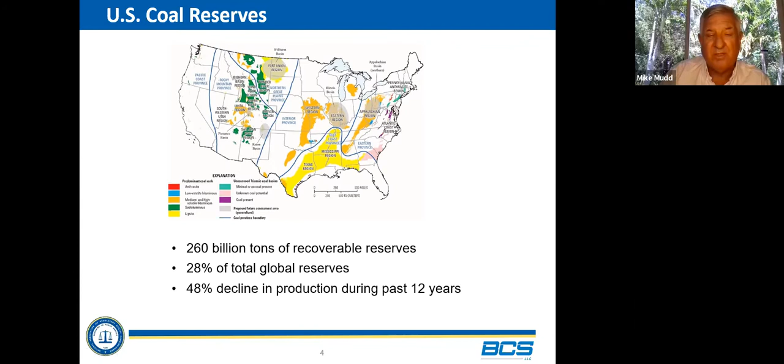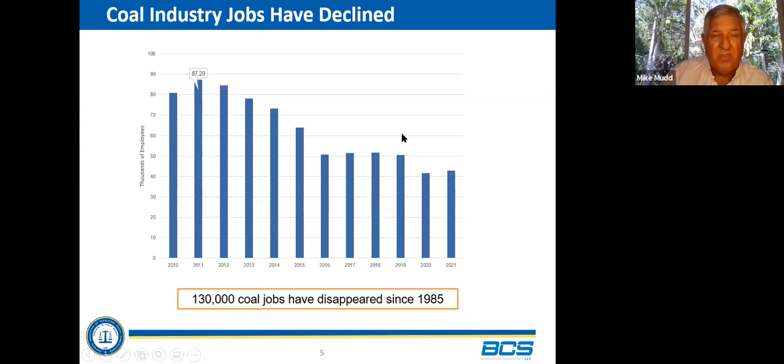Let's first talk about coal, which some now say is a four-letter word. But we have to remember that the United States has huge coal reserves—over 260 billion tons, which is 28% of global reserves. At the same time, there's been a 48% decline in coal production over the past 12 years. That means our national resources are staying in the ground rather than being used, and jobs have declined in the coal industry. In fact, 130,000 coal jobs have disappeared since 1985.

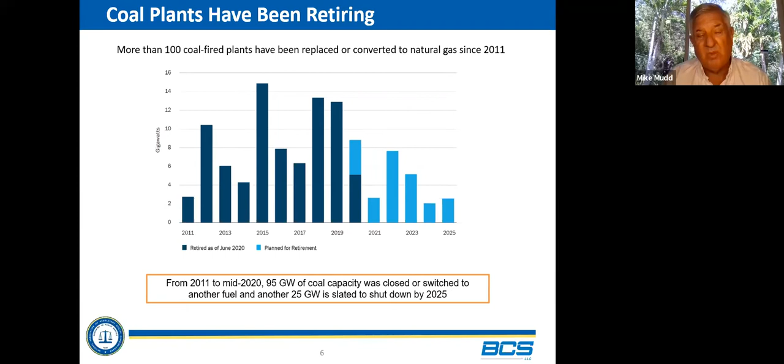At the same time, coal plants have been retiring. More than 100 coal plants have retired or been replaced with natural gas since 2011, which is 95 gigawatts, with another 25 gigawatts scheduled to be shut down by 2025. This touches me personally because early in my career I was involved in design and construction of 1,300 megawatt plants, the largest at the time in our country, very efficient supercritical plants with state-of-the-art controls. Those plants are being shut down now, showing the rapid shift away from coal. When we built them, we thought they'd last 40 to 60 years or more.

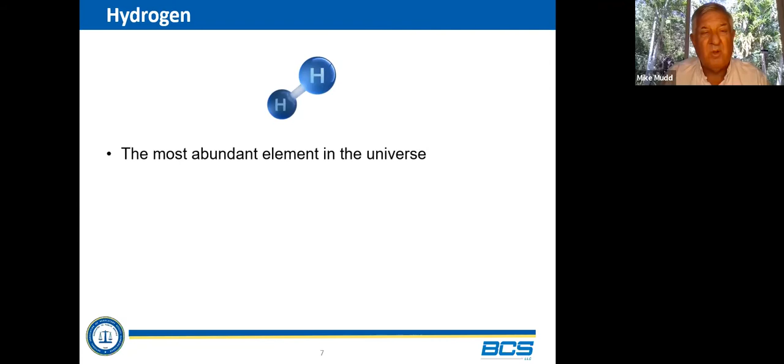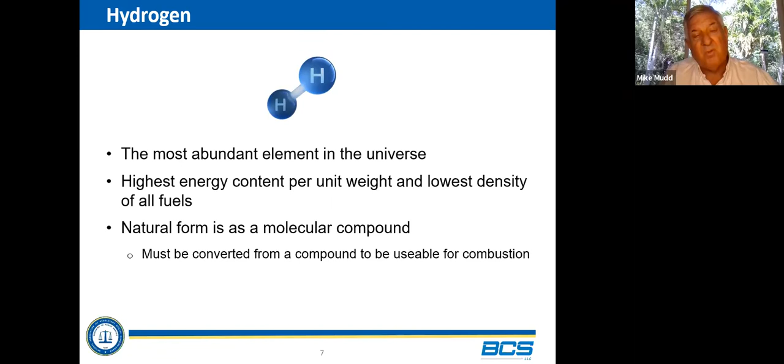Now let's talk about an eight-letter word instead of a four-letter word: hydrogen. What is hydrogen? It's the most abundant element in the universe, with the highest energy content per unit weight and the lowest density of all fuels. Its natural form is as a compound—you don't find natural H2 in the atmosphere. Therefore, it must be converted from a compound to be usable for combustion, which I will get into.

There are a lot of advantages of using hydrogen. It's a versatile fuel that offers a path to long-term economic growth, with the potential to meet 14% of the total U.S. energy needs.

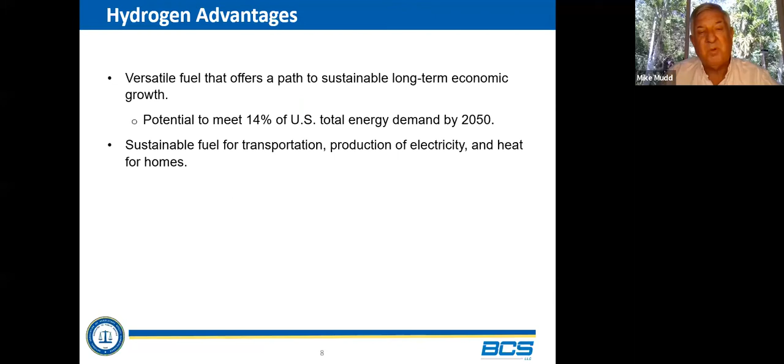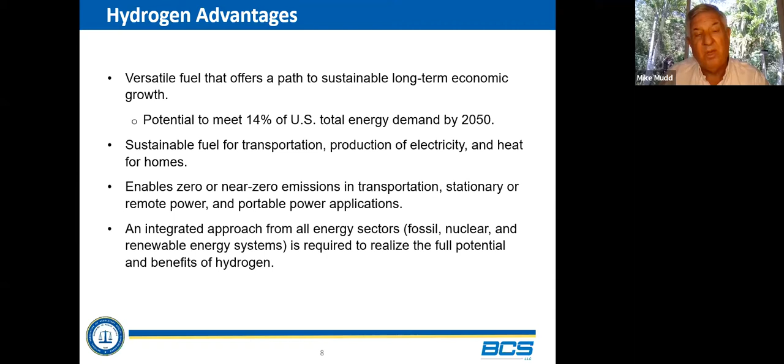Hydrogen can meet energy demand without emitting CO2 by 2050. It's a sustainable fuel for transportation, electricity, heat for homes, and many other uses. It enables near zero emission use in transportation, remote power, and portable power applications. With hydrogen, you can have an integrated approach across all energy sectors if you want to realize the full potential and benefits of hydrogen.

Let's talk about the three ways hydrogen is produced. One is called electrolysis. You can look at it like a battery: you take water, put it in with a cathode and an anode, and it converts the H2O through electricity, breaking it into hydrogen and oxygen. Right now, this is the most expensive process for making hydrogen. I'll show that in a subsequent slide.

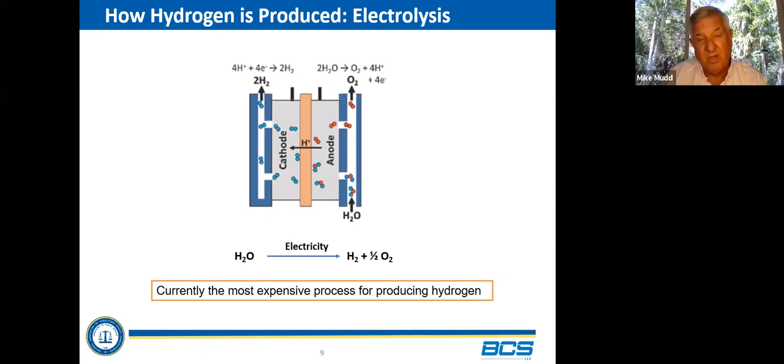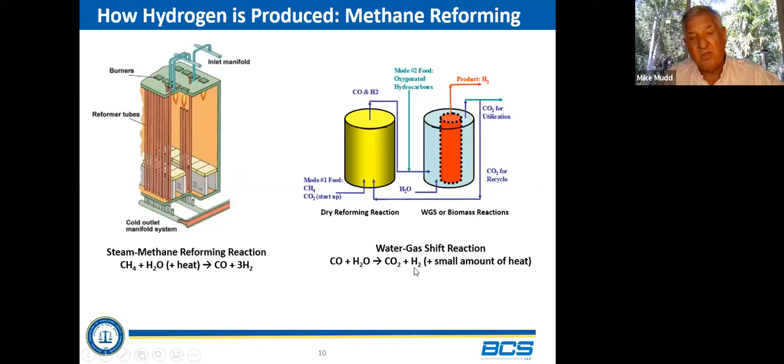Another method is called steam methane reforming. In that, you take CH4, natural gas, heat it with water, and it forms carbon monoxide and hydrogen. Then you take the carbon monoxide and run it through a water gas shift reaction, reacting it with water to form additional carbon dioxide and hydrogen. Right now, this is the most common way to produce hydrogen.

A third way we talk about in the report is gasification. You take a carbon-containing material, like coal, put it under pressure, feed it into a reducing atmosphere, and convert the carbon to carbon monoxide and hydrogen. I want to point out this is not an accurate chemical equation, but the oxygen is in there because there is oxygen in the process.

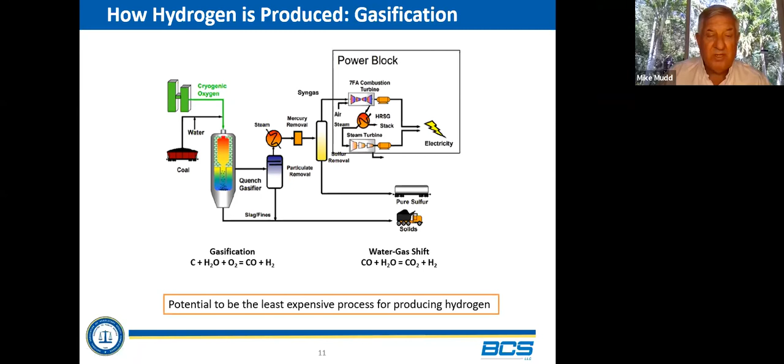You then take the carbon monoxide through that same water gas shift reaction and convert it to concentrated CO2 and hydrogen. That's a water shift - that's how gasification produces hydrogen. I'll go into more detail on that later. This also has the potential to be the least expensive process for making hydrogen.

The comparative cost of hydrogen production is shown here. You can see that steam methane reforming is roughly $2 per kilogram. Coal gasification is lower. If you do coal gasification with biomass, it's somewhat higher. At the same time, electrolysis is about 3 times higher than these methods.

This curve shows the relative CO2 emissions. You can see how CO2 emissions go up significantly with gasification, but if you do it with biomass or electrolysis, depending upon the source of power used, you can have zero emissions when making hydrogen.

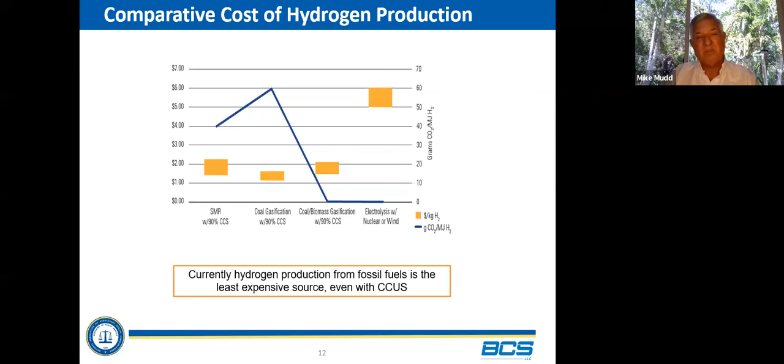Currently, fossil fuels are the least expensive source, even with CCUS, but we still have to address the CO2 aspect of that. Current hydrogen production in the US, as I mentioned, is dominated by steam methane reforming through natural gas, producing 96% of hydrogen in our country. Electrolysis is a trivial amount.

Worldwide, 76% is still by steam methane reformation, more by gasification, mostly in China, but still a very small amount by electrolysis due to the higher cost.

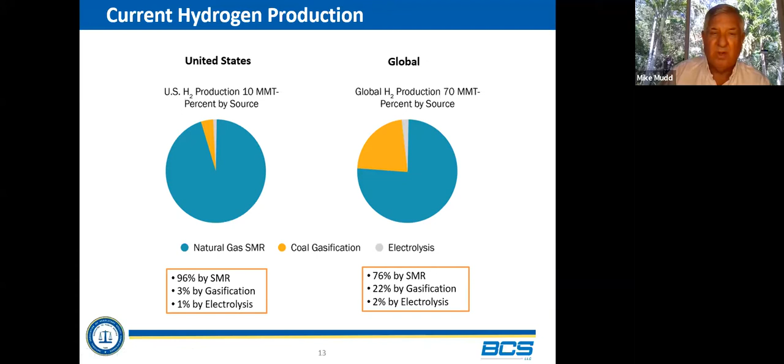Let me talk a little bit about coal combustion. What happens when you burn coal? The main elements of coal are carbon, hydrogen, oxygen, nitrogen, and sulfur. When you mix that with oxygen and nitrogen, you form carbon dioxide with the carbon, water with the hydrogen and oxygen, NOx - NO, NO2 - with the nitrogen, SO2, SO3 from the sulfur, and ash as fly ash or bottom ash. Of course, the outcome of that is heat.

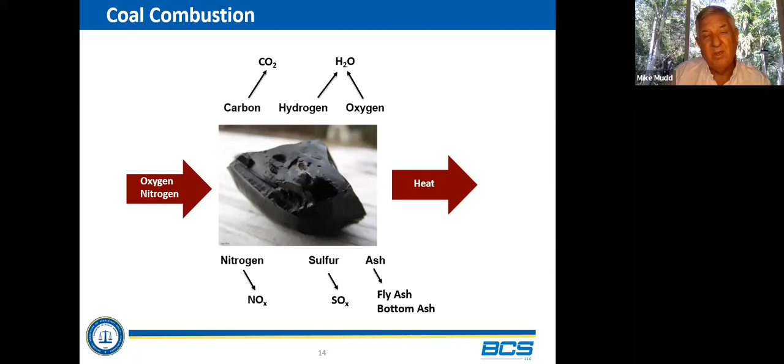So what happens in a boiler? You take that heat from combustion of coal, put it in a boiler in a power plant with feed water to make a steam turbine.

But now you have to put these elements on the back end of the power plant: an SCR, selective catalytic reduction, to remove the NOx; an electrostatic precipitator or baghouse to remove the fly ash; an FGD scrubber to remove the sulfur; and then a CO2 removal system, typically using an amine solution, to take the CO2 out before it goes to a stack.

Most power plants right now do not have CO2 removal. So from here, the CO2 associated with coal combustion goes to the stack and into the atmosphere. A pulverized coal plant with CO2 removal does not produce hydrogen in the process.

But this is the traditional way that they burn coal in order to make power.

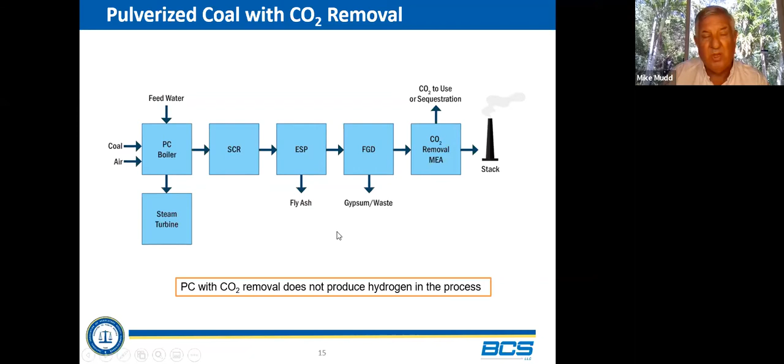Let's talk about gasification. In gasification, you take coal and feed it into a gasifier. Under pressure, you have that reaction I was talking about, where carbon is converted to carbon monoxide and hydrogen. You cool the gas, and then put it into another system for the water shift reaction, where carbon monoxide plus additional water forms carbon dioxide and hydrogen.

It's under pressure, so now you feed it through two additional boxes. One gets rid of the sulfur, and the other goes through a CO2 removal process. Because a gasifier is under higher pressure, the technology used to remove CO2 is much more efficient and lower cost than with a conventional plant.

You need an air separation unit to remove the nitrogen from the air, which allows a lower volume and a more efficient gasification process. The steam generated feeds what's called a combined cycle - there's a gas turbine and also a steam cycle. That combined cycle provides a much more efficient way to generate electricity than with just a steam cycle in a conventional PC plant.

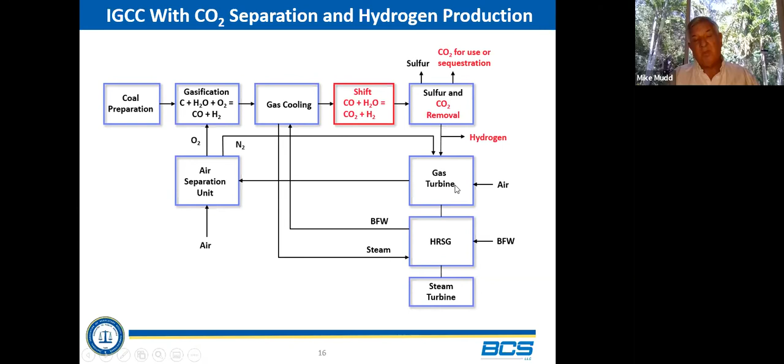In gasification, when you take the elements - in fact, give a good chemical engineer these different compounds and they can do virtually anything with it. That's why if you see a gasifier plant or a chemical refinery, you see an abundance of different vessels and processes, because under pressure you can do quite a bit more, which is the advantage of gasification.

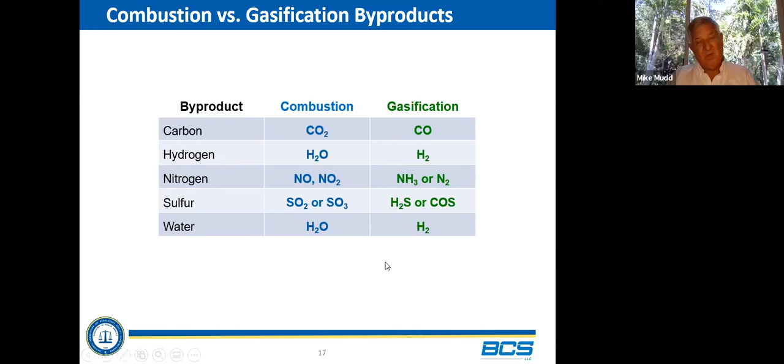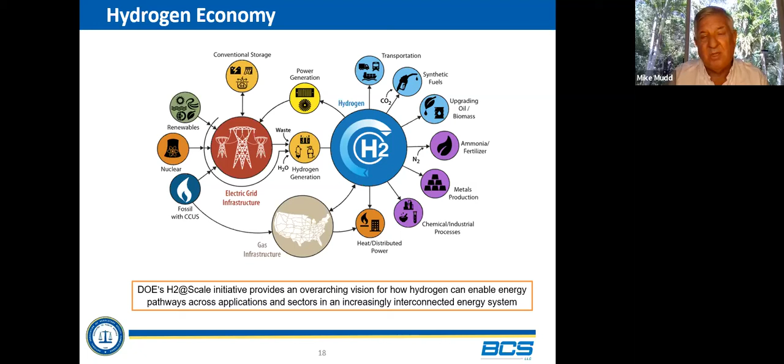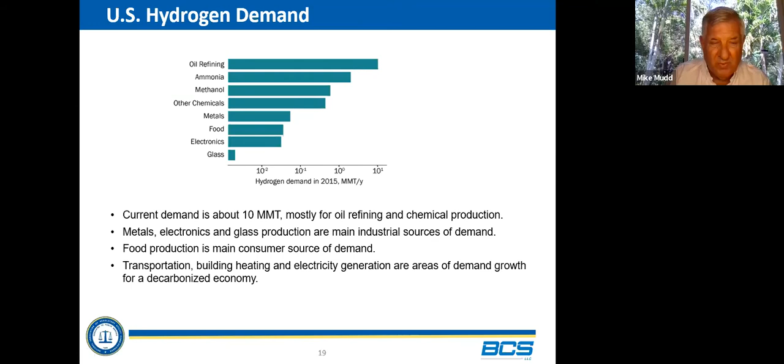What's the demand for hydrogen in this country right now? Mostly it's used for oil refinery and chemical production. It's used for metals, electronics and glass, and food production. It's used for transportation to a very low extent, building heating, and electric generation, but to a lesser level.

Right now in our country, the demand for hydrogen is approximately 10 million metric tons. But the scenario is that eventually we can triple that - enabling over 30 million metric tons of hydrogen demand in industry across all the different uses. How can that happen? It can only happen through R&D, by coming up with meaningful R&D targets and meeting them, and looking at the necessary market and transition barriers that have to be overcome.

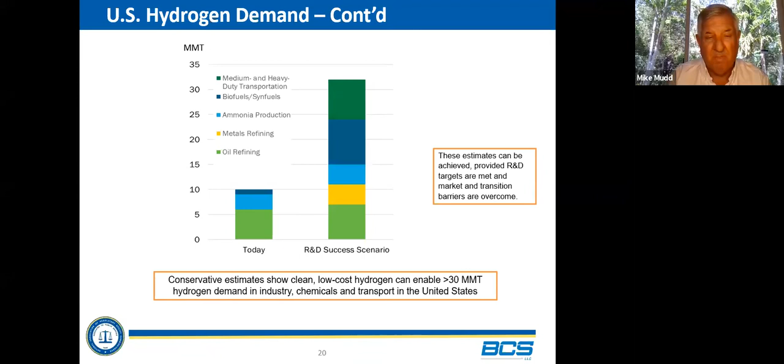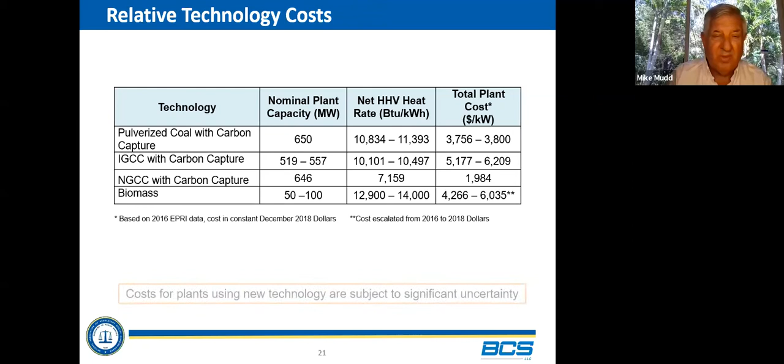Every report has to include the cost of technology, and this chart shows the relative cost of technology. I'm not going to go into that, but I do want to point out that a lot of these - PC with carbon capture, IGCC with carbon capture, natural gas combined cycle with carbon capture - these are estimates. These costs are typically developed through what's called a FEED, front-end engineering and design study. They're studies that assume a lot of assumptions and estimates. With first-of-a-kind technology, it usually takes 3 or 4 plants before you truly have a mature plant where you have a good handle on the cost.

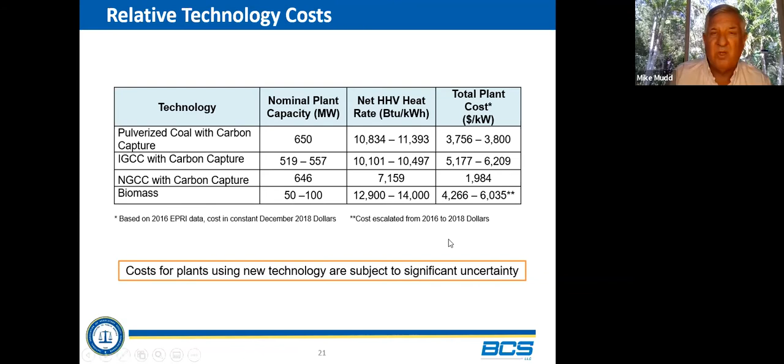So whenever you're looking at the cost for a new plant using new technology, look at it with jaundice. Get some consultants to take a look at it, to critique it, and make sure there's sufficient contingency and sufficient realism behind it, because there's a good chance it'll be low, which I think history has proven with many new plants. Talking about carbon capture, that's discussed extensively in the report, but I just want to touch on it.

The first one is called post-combustion, which you use in a pulverized coal plant. That's that box at the end. It's a flue gas separation system where simplistically you can look at it as a box where they take what's called an amine, and the amine is fed into a reactor, into the flue gas. It mixes with the flue gas, and at a temperature of about 100 degrees Fahrenheit, that amine will absorb the CO2 in the flue gas.

Then you pump it into another vessel to heat it up to about 200 degrees Fahrenheit. So you cycle it between 100 degrees Fahrenheit to capture it, 200 degrees Fahrenheit to release it. You recirculate it. The high cost of that and the challenge are two things.

First of all, it's called a temperature swing. And that temperature swing of 100 degrees costs a lot of energy. It can take about a quarter of the output of the power plant away in being able to do that. A lot of the research and development has to do with reducing that temperature swing, which would make the process more efficient.

There's also attrition. There's loss of the amine in the process. They've got to look at amines which would tend to have less loss to it.

Oxy-combustion, just want to touch on it. It's another technique that's used in the pulverized coal plant to recirculate the combustion exhaust, increasing the CO2 concentration. The higher the concentration of CO2, the easier it is to remove from the process, the lower cost it is.

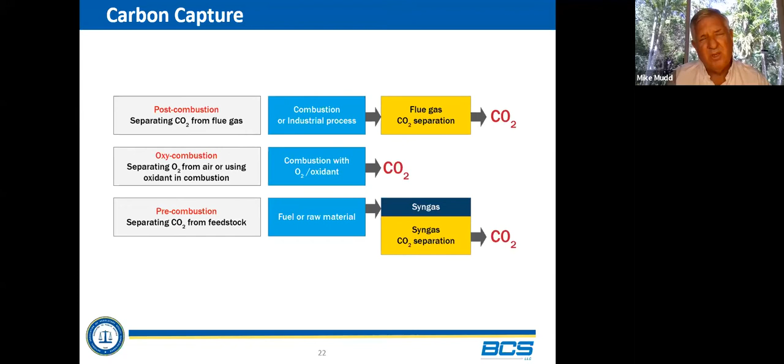And the challenge with making those more effective is two things: reduce the pressure swing, and find a sorbent with much less attrition that will last much longer. So those are basically what I just touched on. There's more detail on that in the report.

What do you do with the carbon once you've captured it? This is a DOE diagram showing that if you take the point source capture, you can put it in geologic storage, pump it down in the earth. There's been a lot of research about that. The advantage is you can basically store it forever down there. Two disadvantages: first of all, it's regional. Not all sections of the country have the geology conducive to good geologic storage. The Midwest Basin and the Texas basins are probably two of the most robust areas for carbon sequestration.

The biggest use now is for enhanced oil recovery, where they can take it, pump it into oil wells, change the viscosity of the crude oil in the ground, and make it easier to extract to improve the performance. That right now is the biggest use of carbon dioxide that is captured. And it can also be used for other processes.

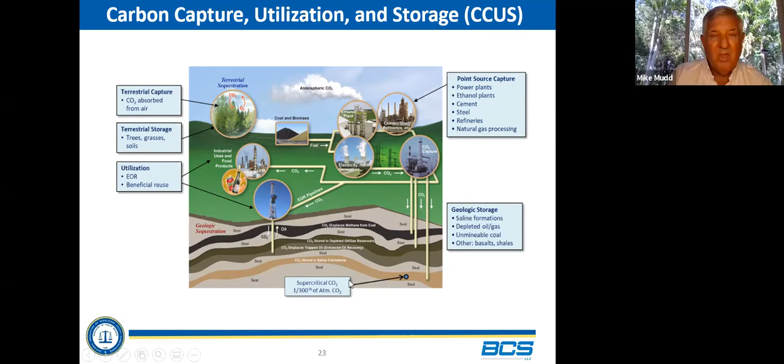I also want to touch on there are other ways to capture carbon that the DOE is looking at. Terrestrial capture, which is absorbing from air. There's terrestrial storage, trees. The biggest example is the rainforest in South America. So there's an integrated approach. In our report, we talk more about that.

There are many potential utilization streams for CO2 shown here. The DOE has a lot of research and development. And I don't want to go into details, but I want to pass a message on, and that is to look at the huge quantity of CO2 that can be generated.

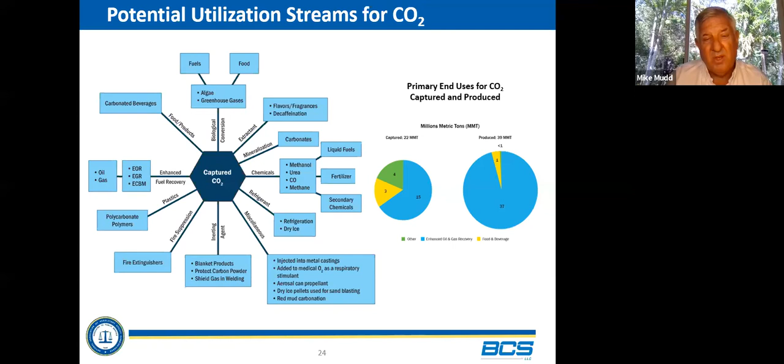A 1,000 megawatt plant would generate approximately 6 million tons of CO2 per year, and that's from a single 1,000 megawatt plant. So if you look at all the plants together, that is gigatons of CO2. So while there's a lot of interest in using it for smaller applications on a micro scale, if we are to reduce the CO2 in the environment, we need to focus on the mega scales rather than the micro scales. That's where the money has to be in order to advance the reduction of CO2 in the atmosphere.

So what are the challenges associated with carbon capture and utilization? It's very capital intensive. It's got a high parasitic load, reduces the output of the plant. It has a higher operating cost. The technology and operational risk, because it's still a relatively new technology. And there's legislative uncertainty too.

You know, should you invest in CCUS? Will coal be allowed to continue to be burned? Will there be a carbon tax? Can you store it? So there's big issues that have to be dealt with. There's uncertainty in the revenue stream associated with CO2. I mentioned the main use is enhanced oil recovery. In one of the case studies I'm going to touch, you can see how that can become a real issue. And there's a liability potential of CO2 leaks.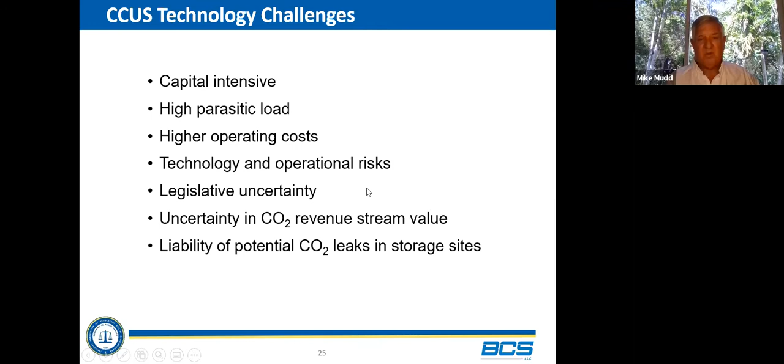I mentioned the underground storage. I believe it's safe. Geologists convince us that it's very safe, but it's the obligation of industry to convince the general population that it's safe to pump CO2 in the ground beneath them. We cannot assume the public's going to say, no problem, we trust you. It's up to industry to convince people and demonstrate that it's safe. Absent that, there's going to be a lot of issues with respect to the potential liability of CO2 leaks.

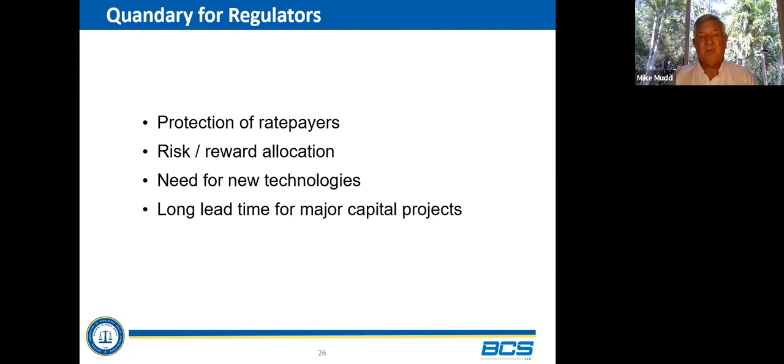So what's the quandary for the regulators? Of course, their job is the protection of the ratepayers. At the same time, how do they handle the risk-reward allocation? For every risk, who should get the reward? But we need new technologies to move on, to continue to improve our environment and our lifestyle. And there's a long lead time for major capital projects, so a decision they make today might not happen for up to 10 years.

So let me put it another way. What are the risks that have to be looked at? There are technical risks: the performance of a new technology, the guarantees for new technology, the availability, meaning how will it run all the time, or will it be down with shutdowns quite a bit? And what's the schedule? Can they truly have their arms around the schedule for a new plant? I'll get into that in a second too with the case studies.

There's cost risks. I mentioned there's cost uncertainty with new technology. With the long lead time, escalation is always an issue. What do you assume as far as the annual escalation? For the past several years, it's been low. Inflation's been low. Back 20 years ago, inflation was going crazy with steel prices and commodity prices and so on. It's hard to understand that, and who's going to take that risk? There's costs of redesign. As with something new, you've always got to make changes, and that's a big risk.

And the market prices, okay? When you come up with that, what's going to be the market price of the electricity, the hydrogen, the CO2? There's market risk, and when you're looking at over a decade worth of planning, how can you accurately come up with those market prices? And there's regulatory risk. It takes a long time for the approval of these projects. You'll have interveners. Whether you have a good or a bad project, you can know one thing for certain: interveners will be coming in and wanting to have their say.

There are many policy changes. Every time there's a policy change, it can impact the schedule and the cost. The biggest example is that when they were building the nuclear plants, there were a lot of policy changes. There were changes in codes and standards that caused design, redesign, and delays in the project. And finally, changes in law. Is there going to be a carbon tax? What's going to be the law with respect to emissions and so on?

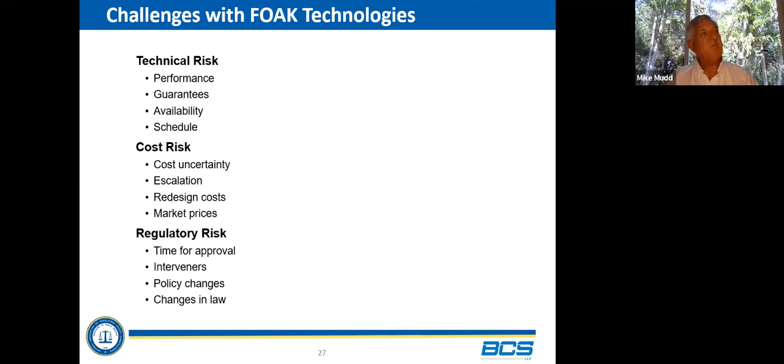Those are big risks. So let me show it another way. You have all these risks. All those risks translate into dollars.

And there's a tug of war. Is that up to the owners? Is it up to the users, the ratepayers? Is it up to the equipment suppliers? Who is going to take on those risks? It's always an issue, but it must be addressed before you can move technology on.

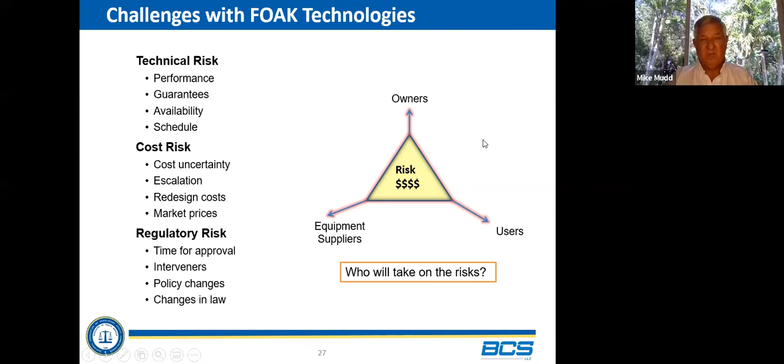Let me just talk about some of the other projects that I mentioned in our report. One is called the Petra Nova project in Texas, a $1 billion project. That project was a 240 megawatt slipstream, which operated from 2017 to 2020, a very successful demonstration of carbon capture from a conventional coal plant.

It became uneconomical when CO2 prices changed, the main output of the CO2 was to sell it for enhanced oil recovery to the oil companies. But when oil prices plummeted, it wasn't cost effective to use enhanced oil recovery anymore. The plant had to shut down. When the plant's sitting idle for a year or so, unfortunately, they still have to pay their mortgage. It becomes an impaired facility. Maybe it'll restart again with higher oil prices, but right now it's an issue, the uncertain market prices.

Edwardsport plant in Indiana, Duke Energy, a fantastic project, one of the pioneering IGCC plants in our country. Construction started in 2008, went to commercial operation in 2013. But it was beset by a lot of cost overruns and schedule delays. It's in successful operation today. But if you look at any of the reports about it, you'll see a lot of people have bruises.

The utility, Duke Energy, has bruises. The regulators have bruises, the ratepayers have bruises. So it's definitely an issue with respect to who's going to be responsible and handle those delays, even though it was a fantastic project.

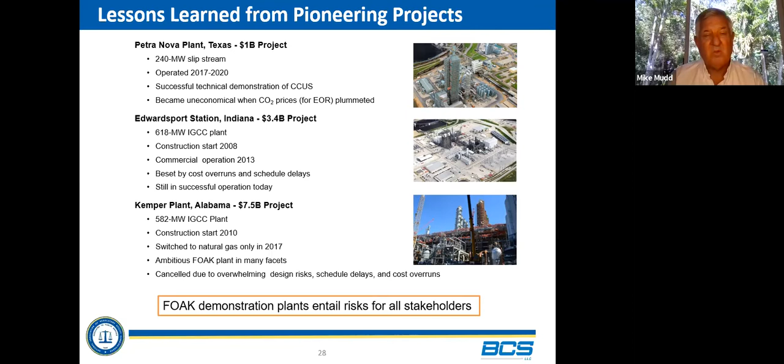It was switched to natural gas. Unfortunately, that transport reactor will probably never see reality anymore, which is a shame, but it shows the risk that you take. So the message is there's always risks for all stakeholders with the first-of-a-kind demonstration plant.

Now, the Department of Energy has a fantastic program to look at hydrogen. Two of them are the hydrogen strategy and their plan, which just launched a hydrogen shot. Their goal is that within a decade, they can have 1 kilogram of hydrogen costing $1. So it was launched just recently, and it's definitely worth reading those reports.

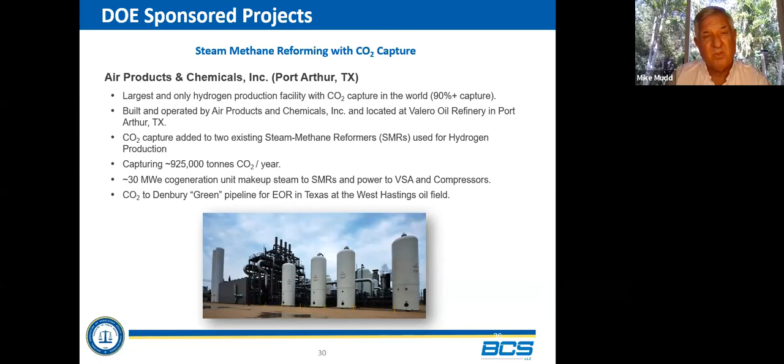Some of the projects that DOE sponsors are steam methane reforming with CO2 capture. The DOE is trying to find ways to reduce the cost of capturing CO2 with natural gas. They're working with Air Products in Port Arthur, Texas to do that. Another 2 projects are FEED, front end engineering and design studies with EPRI in Palo Alto, with Wabash Valley. These have to do with gasification of biomass.

I just want to touch briefly on the advantage of gasification with biomass. When you look at using biomass as a renewable fuel, the concept is that as long as it's sustainable, you take forests that you can replant, they absorb the CO2, you may emit CO2 when you're burning them, but then the new plants will absorb the CO2 again, a kind of closed-end zero emission cycle. But at the same time, if you put carbon capture into the process that either burns or gasifies, you're removing more CO2 from the process than you're emitting. So the opportunity with biomass is what's called a net negative carbon system, and the DOE is sponsoring a lot of research in that area.

So what does it take to move new technology forward? Let's look at the three legs of the stool. The federal government must continue to fund the development of new technologies through basic research, development, and demonstration phases. The government, through the Department of Energy, has done a wonderful job of this in the past years. I'm sure that'll continue. But just let me talk about those 3 elements.